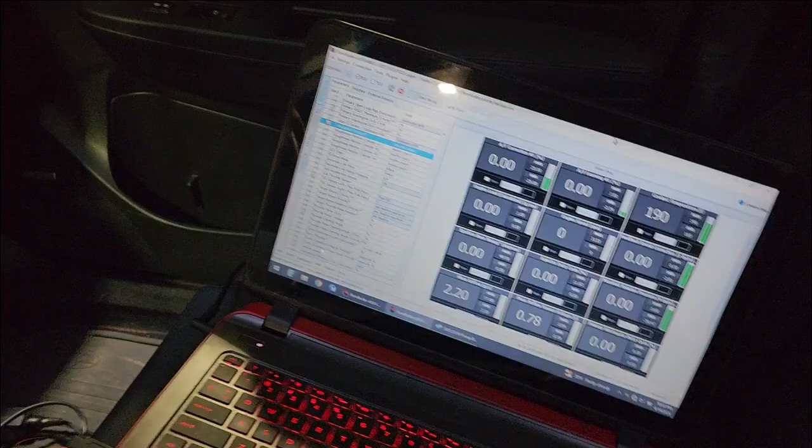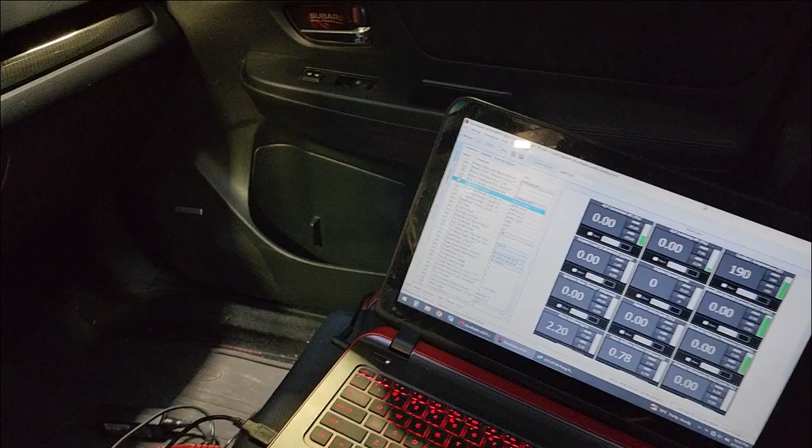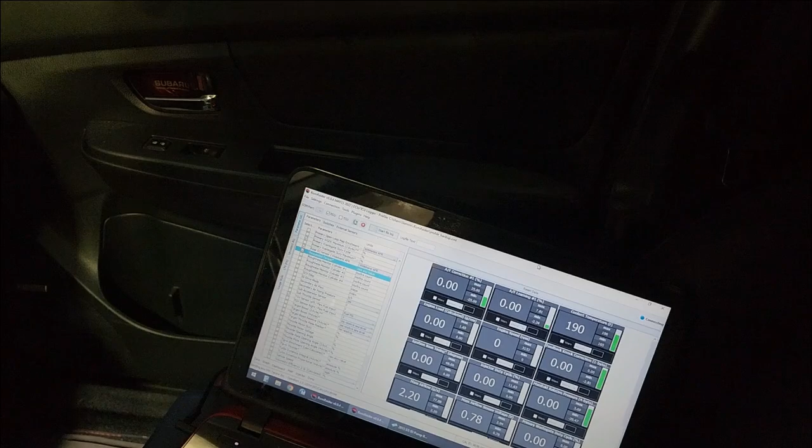All right, so normally with the deadhead system, I could start it up, the fuel trims would be perfectly fine. It would take a couple minutes for it to really blend the system together, all the fuel and everything, and then it would stabilize. But since I changed the setup, I'm pretty sure it's going to transition pretty fast, because as soon as I hit the key, it's going to feed whatever fuel was in the lines through and immediately start picking up the ethanol. So I topped off the gas tank completely. So let's see how fast it actually, there we go.

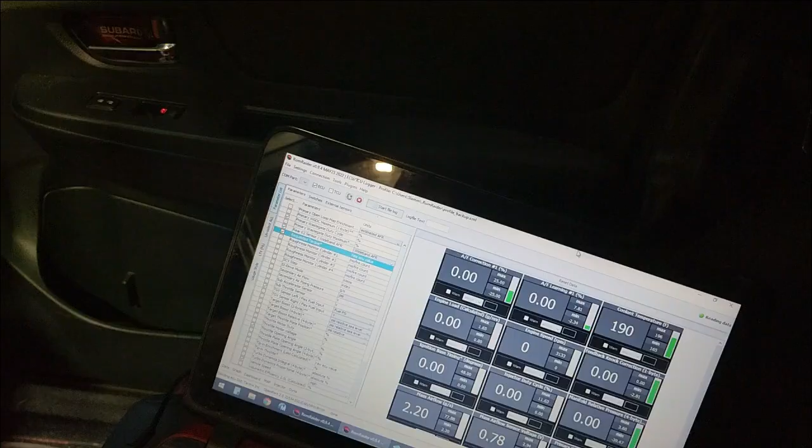So the car won't go into closed loop fueling for a few seconds, and it should immediately start adding fuel, sorry, not pulling fuel. So yeah, we're 21% so far, 23, 25. Let's see where it stabilizes. It looks like it might want to stay right around there.

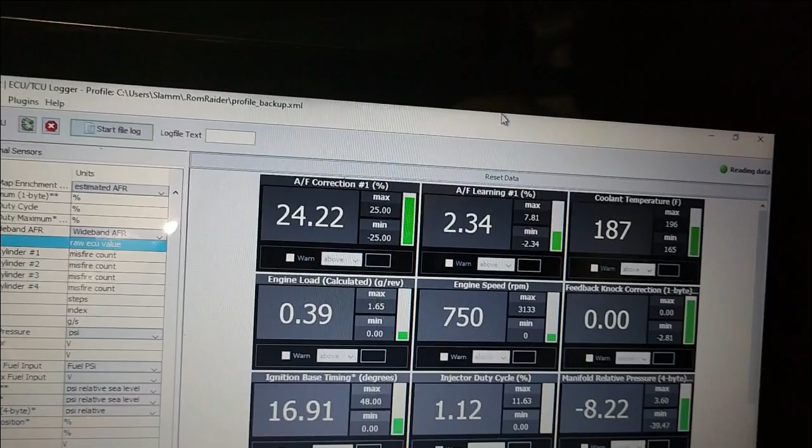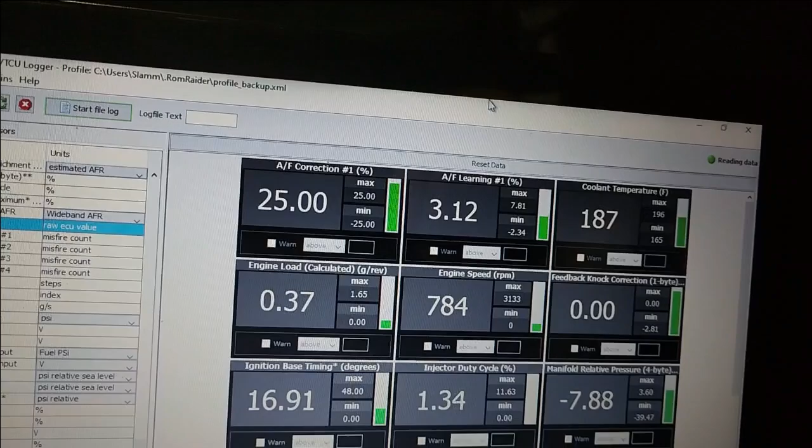So yeah, it looks like it's going to be somewhere around 25% combined. So 27 there, 28. Yeah, so it looks like we're good on the ethanol from what I normally am used to seeing, between 25 to 30%. So I'm going to go ahead and pull out of this pump right now and go park off to the side so I can flash the car over to my original map.

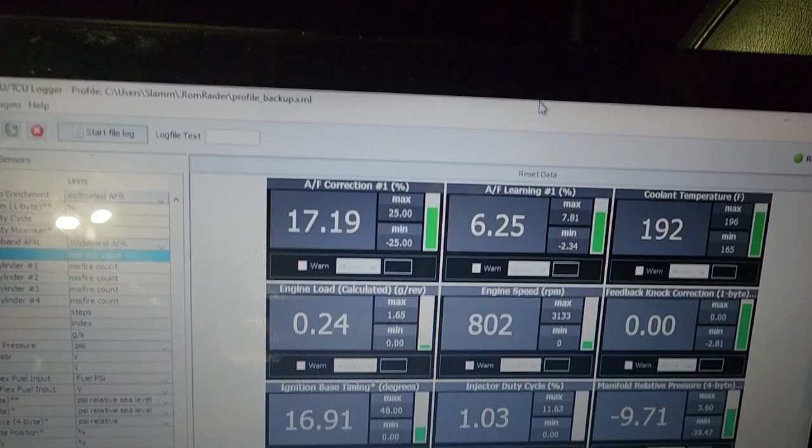Yeah, so look at 29, almost 30% so far. So yeah, everything's looking good. Let me flash it over and we'll check it out again. All right, so I'm parked over here off to the side. It's been running for like 30 seconds to a minute, but yep, targeting where it wants to target, and we are now, where are we at? Stabilize for a second. I have the AC on, so when the compressor kicks on and off, it kind of throws everything around, but 32%.

So yeah, I mean, that's everything where it should be. But this is a prime example of, just because you put E85 or pump in and it's not correct for the map, for the most part, the car will try to compensate. As you can see, it's targeting 14.7, which it's holding.

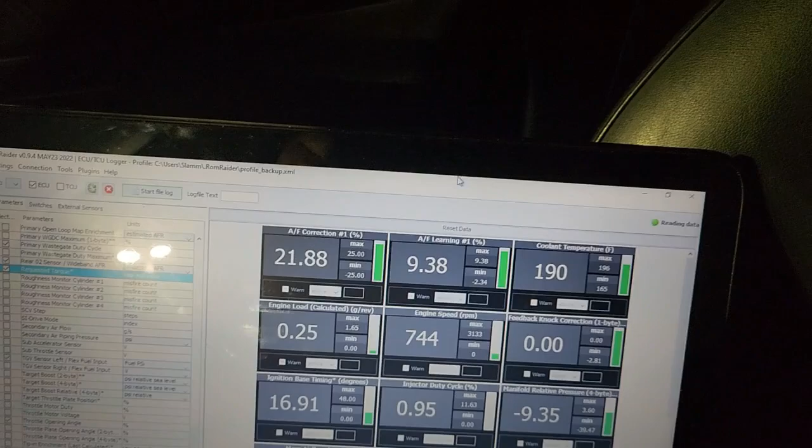But if you don't have an Accessport to look at your fuel trims, or you don't have a laptop to look at your fuel trims, it may be targeting and holding the AFR and drive okay. It might have some weird issues, but it's only because the computer's compensating so much. So now we're already up to 35% almost.

32, 33. So the car will compensate for the most part, and especially if you're driving on the highway without full load, the car will try to compensate as quick as it can and as much as it can. But the only true way to tell is obviously under wide open throttle. The car will not resort back to your fuel trims. It will just go to what was programmed in the car,

and that's when you will start to see the issue, especially on Subarus. I believe it switches from closed loop to open loop around, I think it's a very small amount, 3 to 5 psi is when it starts to transition. So you could be partial throttle. As soon as it gets to about that point, it'll transition over, and that's when it would start having the problems. Or just straight wide open throttle.

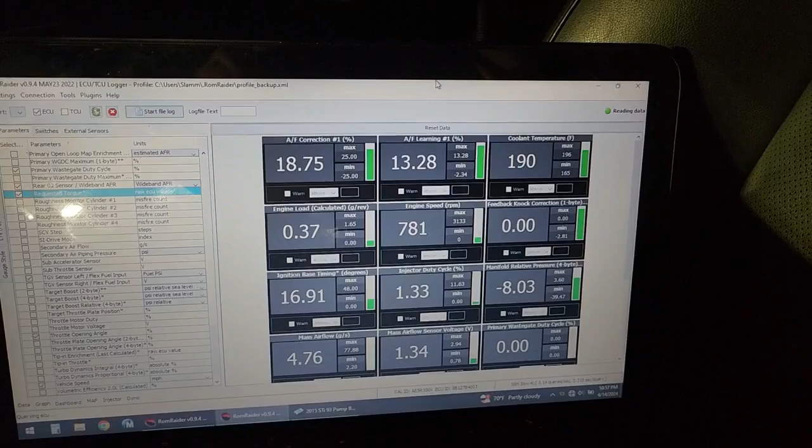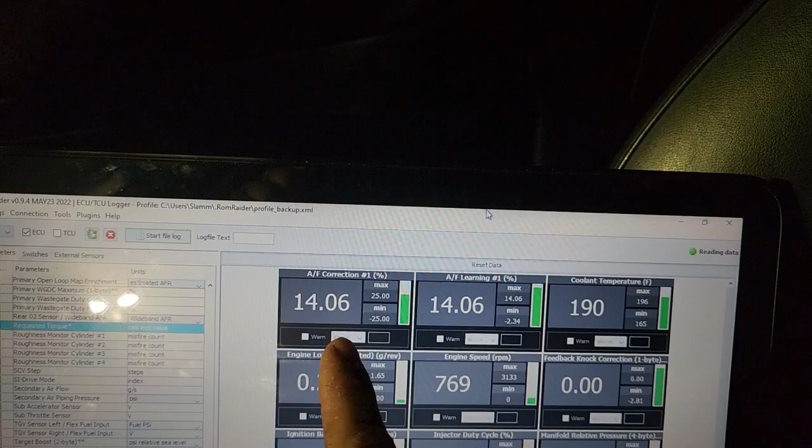But yeah, so we're down to, where are we at? 30, 31, 32, somewhere in there. And the reason why I'm saying 30-some is your fuel trim correction is what it's doing at the moment. That will always kind of bounce around here and there. But as it learns, it will transition that number back to here.

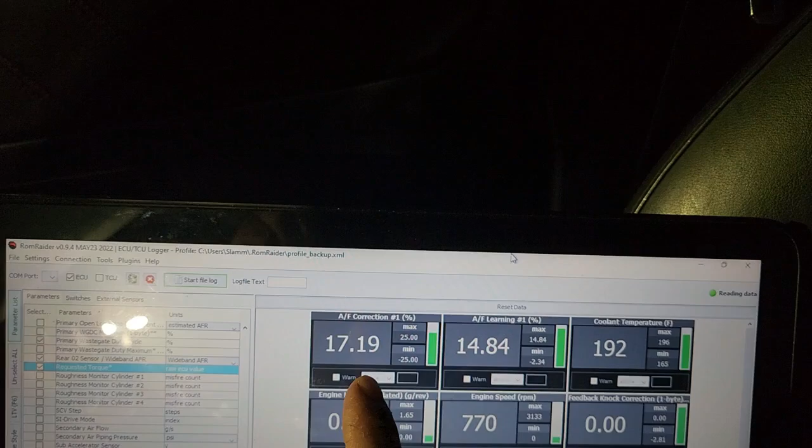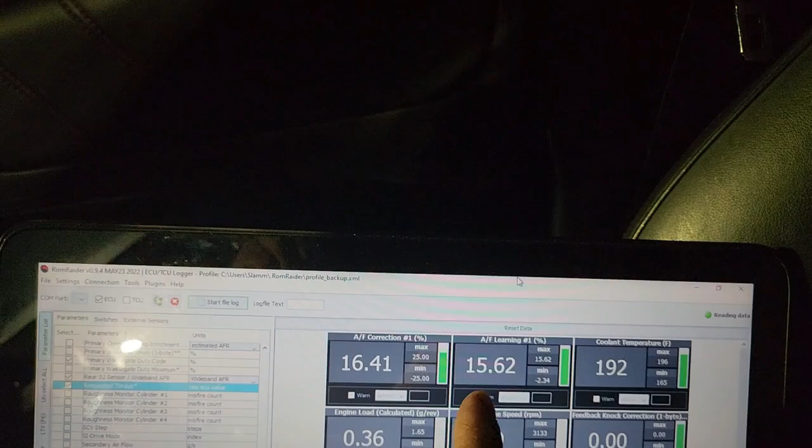So this is what it's already learned at idle to add 15%, and it's still adding 17% on top of that. But if I sit here and let it idle long enough, this will eventually go down to 0. And obviously, like I say, when the AC turns on and off, it does slight corrections, but it will get as close to 0 as possible. And then this number should transition all the way back over to 30%, 32%, or whatever these are adding together.

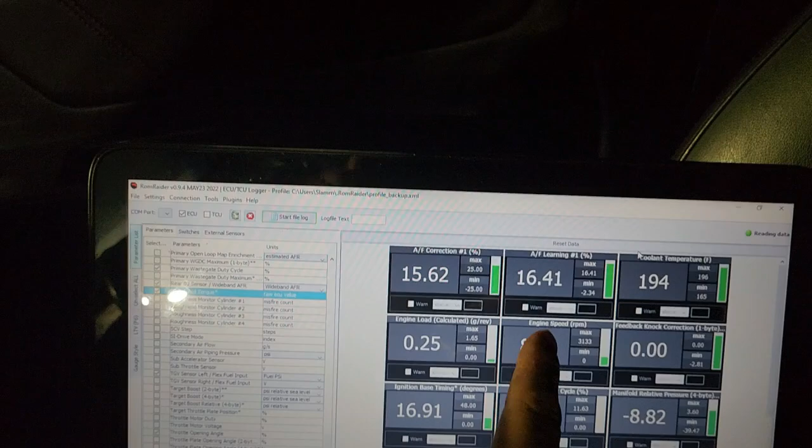The problem is, it depends on the car. Oops, that's what happens when you don't touch your laptop. Depending on the car, each one will max out at a certain amount. The immediate correction, I believe, maxes out at 25%. I don't remember if this is 25% as well, so you have a maximum of 50% compensation. But this one definitely is 25% where it maxes out.

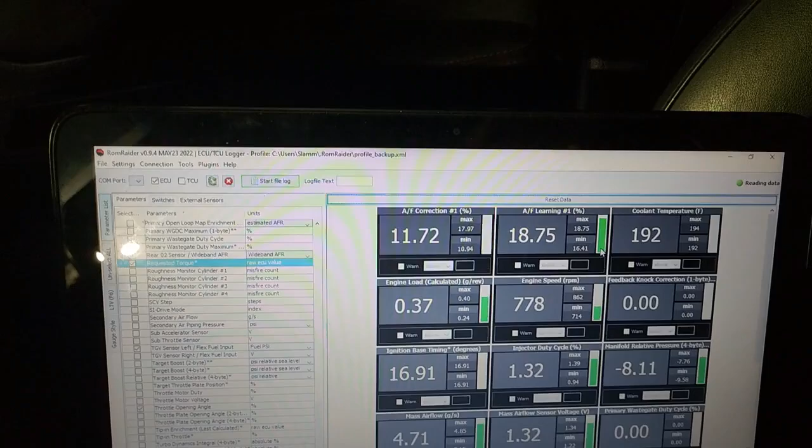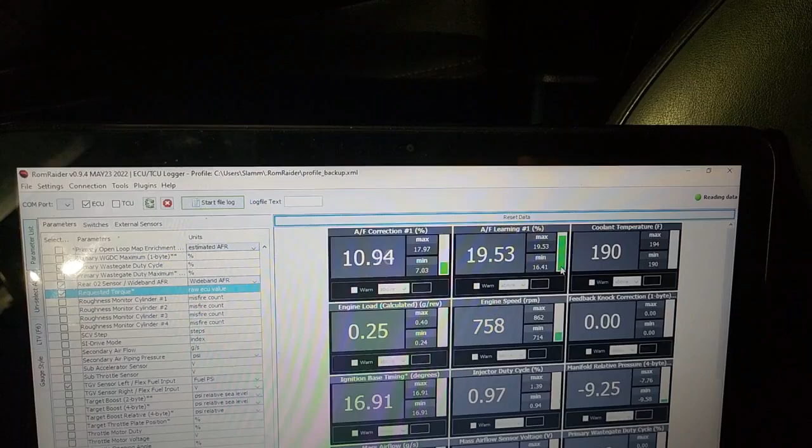I forgot where the learning is. I would have to mess with it to try to get it to completely start trying to correct long term. But I mean, I guess if I let it idle here long enough, we'll find out if it stops at 25% and then just leaves the remaining 7% over here on the short term. Since we're already up to 18.75, 19.53. You know what, I'm gonna go ahead and let it sit here right now, and we'll see where it maxes out, because I know the short term is 25%.

So, but yeah, I'm gonna let it run for a little bit and we'll jump back in, check it out. All right, we're back here. So the car's been running for a little bit more. I think this is where it's going to stabilize, but as I said, when I originally started the car, we were at about 32%. So we're at 32.

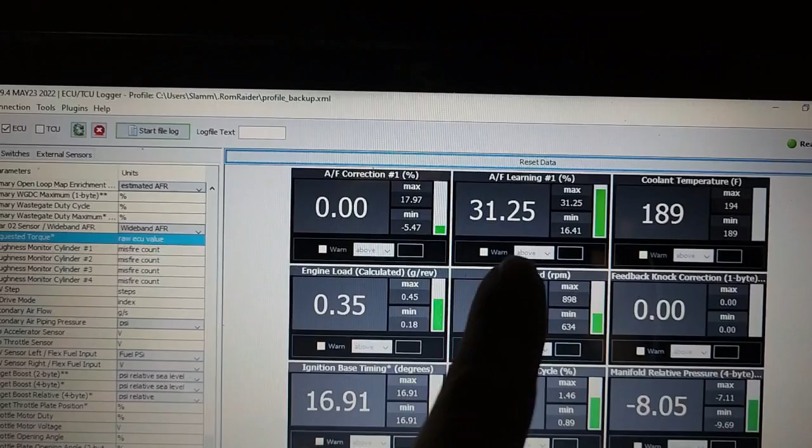Bam, just changed right on the dot. And now your short term is sitting as close to 0 as possible. Like I said, with the AC turning on and off, it does jump back and forth, but this is probably where it's going to stay. For the most part, it sits at close to 0.

When the clutch engages, it'll get rich or lean, and it adjusts immediately. But yeah, the car's finalizing its fuel trim, so we're at 31% right now.

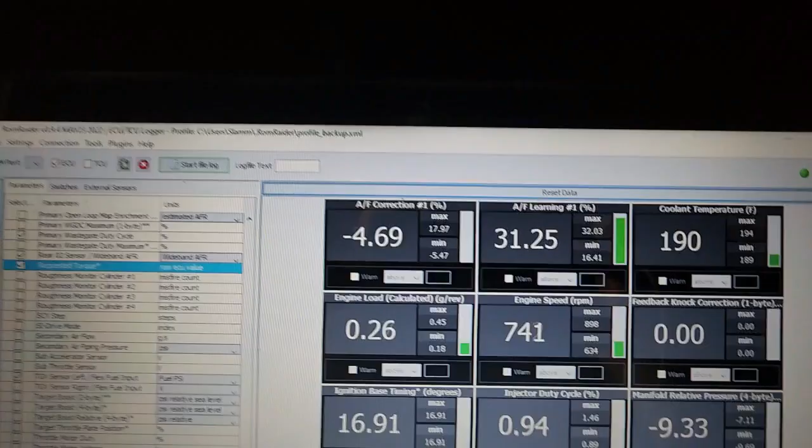But I wanted to show you this table that I have from Carberry, which is for the 02 to 05 WRXs, just so you can, let's see where we're at. So, of how you can use the fuel trims to find your ethanol content. But this is off of another tune.

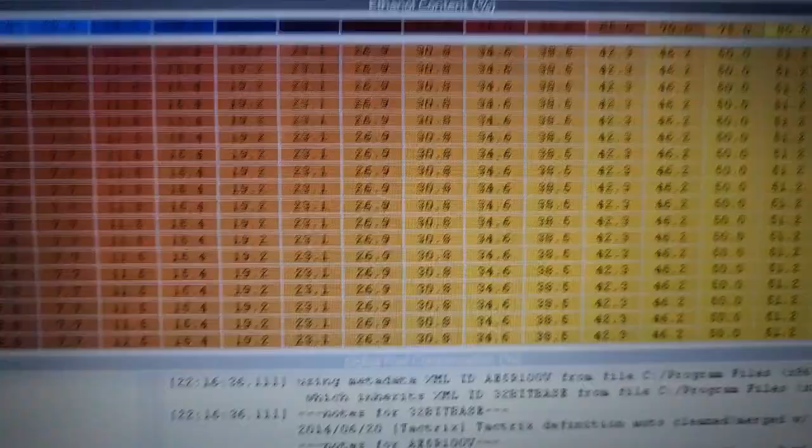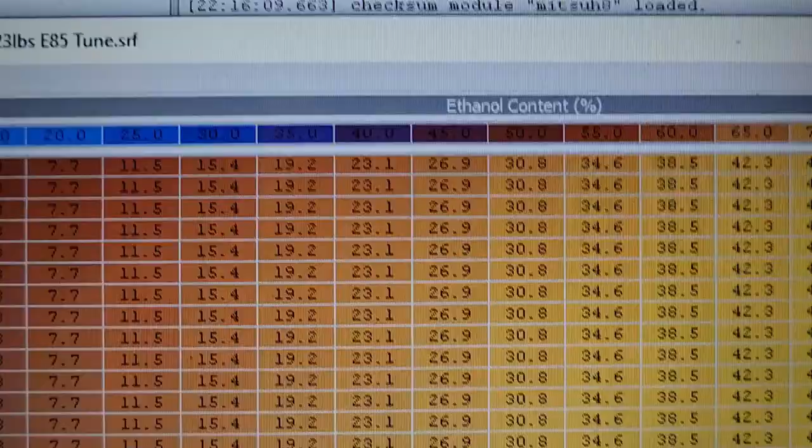But if you look right here, if we're at 30%, adding fuel about 30%, if you go up here, I don't know if you can see that, but that says 30%, 50% ethanol content. So this is a table that, as it reads more ethanol, it'll start adding more fueling, all the way up to an E100, which is about 56%. So obviously this is not exact, but this is a pretty good trim.

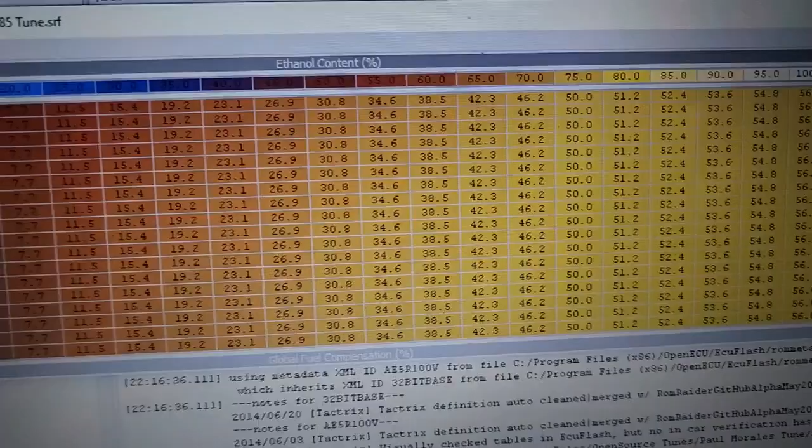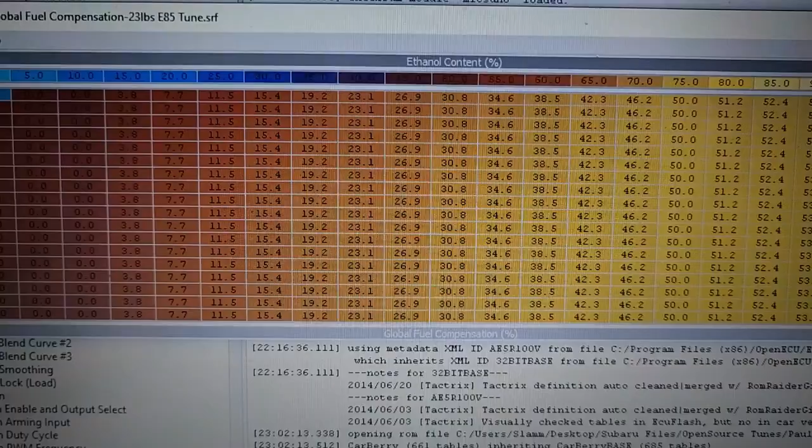This is from my buddy's car, and he's had that car for 3-4 years, something like that, on E85, and it's on a flex fuel setup through Carberry, and he's always ran it out there in Cali, and just fills up pump E85 all the time, no problem starting, no nothing.

But just so people can understand, there is a linear calculation that the fuel will transition as the ethanol content goes up. So like I said, with me being right now at 32%, that falls right in line with what I was thinking, somewhere around 50% ethanol. So I'm tuning everything timing-wise and whatnot based on an E50 mix.

So I'm pretty sure I've never even had a full E85 tank in here, but I just fill up through the pump, and like I said, I just showed the clip. The pump states anywhere between 51 to 83% ethanol. So yeah, it is what it is.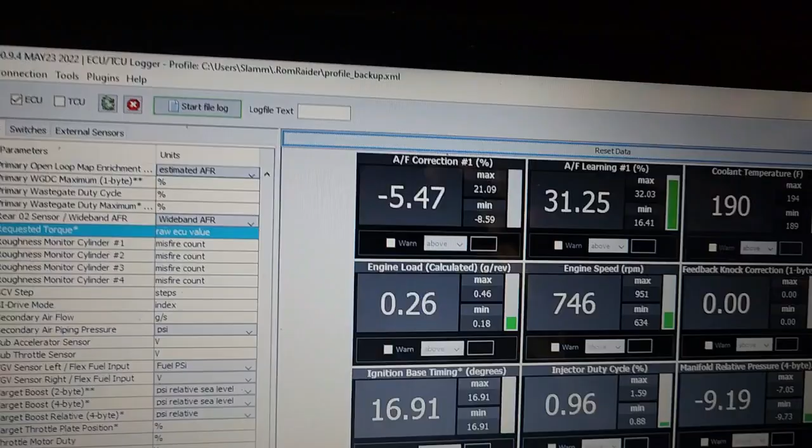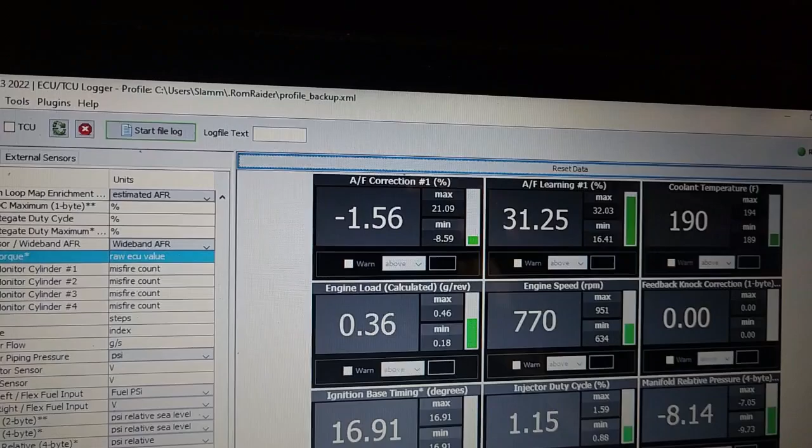But I'm going to go ahead and flash my map back over. But we got up to 32%. So I guess the learning can go up pretty high. So I'm not sure exactly where it's at. Maybe one day I can change the injector scaling just to see where it maxes out. If anyone wants to know, this is the information that I like to know, just because it's good information.

A lot of people don't really talk about it, but I have filled up on my E85 map with pump gas, and vice versa on pump gas with E85 map. You can drive, the car will compensate. The big thing that you do not want to do is do not go into boost. So if you're just trying to get yourself back home or whatnot, stay in vacuum as much as possible, because the car will compensate for the fueling side of it.

It might have some weird judders on like the tip-ins and whatnot, but for the most part, the car will compensate fueling-wise. And in all reality, if you're in vacuum, your timing shouldn't be that drastic a difference from E85 to pump, or vice versa. The main difference comes when you start going into boost, when you can really start advancing the timing. So if you're in this situation like I was, you can drive the car around and it's not going to hurt it as long as you stay out of boost.

If you go into boost, you can definitely do some damage, more so if you're on your pump gas map and you put E85 in the car, because the car will be extremely lean. You won't hurt the car from detonation necessarily, because the timing is a lot safer on pump gas, but it will lean out the car very much and you can crack a piston. So do not do that.

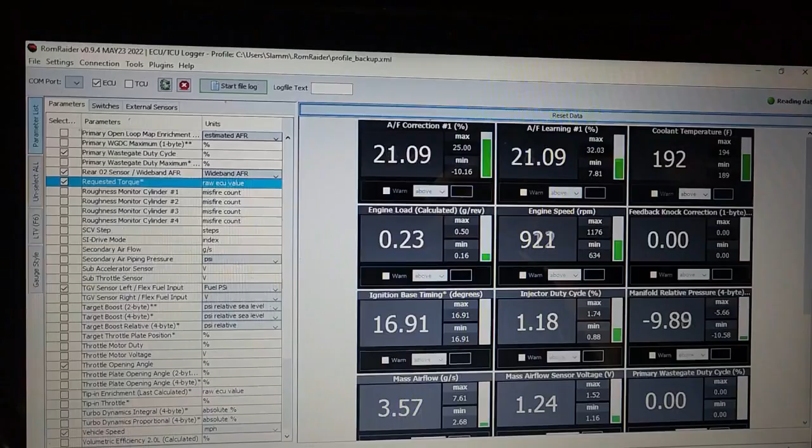So that's right there. So the cars do pretty amazing on adjusting fuel while it's running, and most people never even notice that it does it. So all right, let me go ahead and flash this map over, and we're going to see what's going on here.

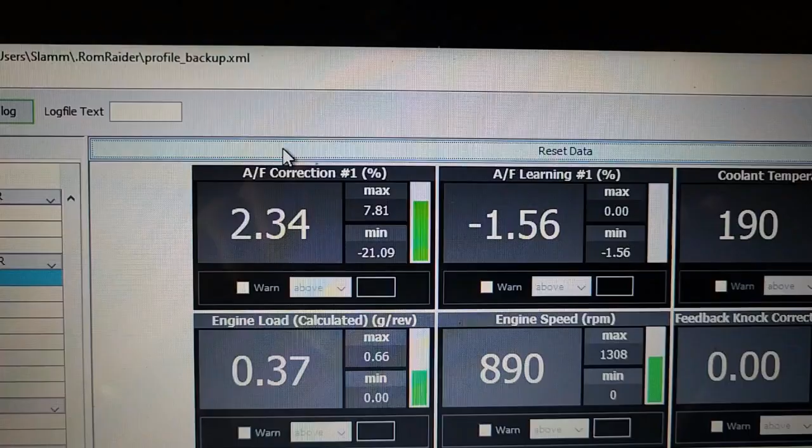All right, so we went ahead and just flashed the E85 map back. Car's kind of stabilizing, so it's learning a little. But right now, as you can see, fuel trim's a lot better. So since we got a negative 1.5 and 2.3, we're at 0.7 or so. Yeah, so we got pretty tight tolerance there at idle, so it's not bad. If I turn the AC off, it definitely is better, but I can live with that.

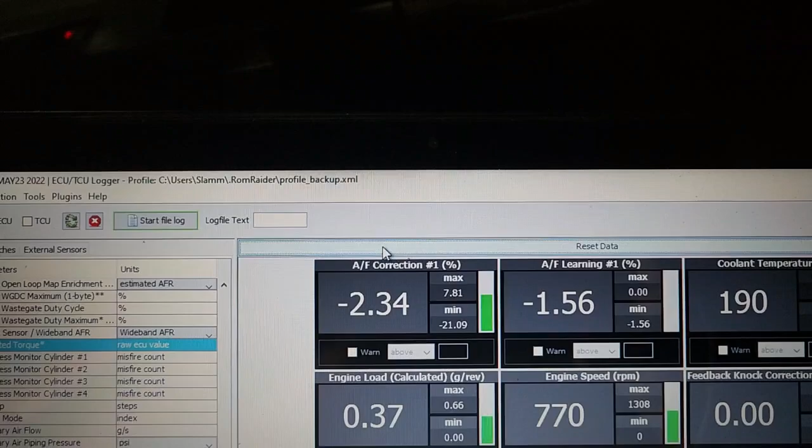4%, a little on the rich side as opposed to the lean side, which I always prefer. For some weird reason, which is kind of funny, if you're ever a little lean and the car has to compensate, you can feel that when you're driving around. What I notice is if you're a little rich, like that, a couple percent, and the car needs to pull fuel, when you tip in or get on it, you never feel it at all. The car is a lot better.

So if you're dialing in your fueling, obviously the goal is 0, but a little on the rich side, like a couple percent, is really not that big a deal. So you'd much rather be on the rich side as opposed to the lean side when you're driving around. So just keep that in mind. I know everyone wants to try to target 0, but in all reality, you're never going to get a straight up 0, because it's going to depend on if your AC's on, if you move your steering wheel. There's so many factors, and every car in stock form does the same thing as well.

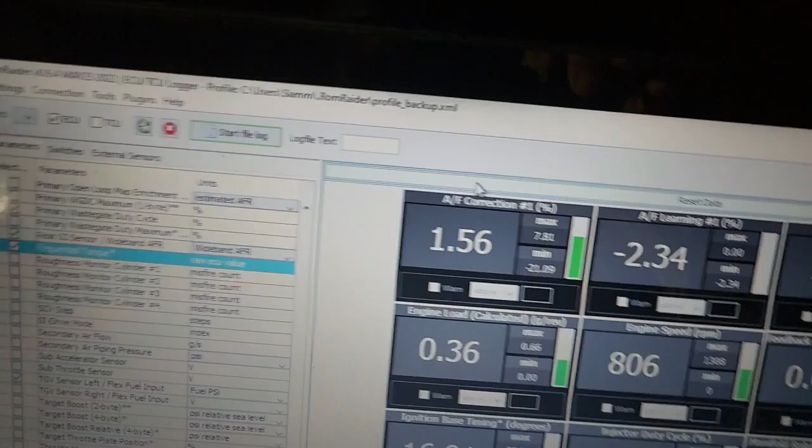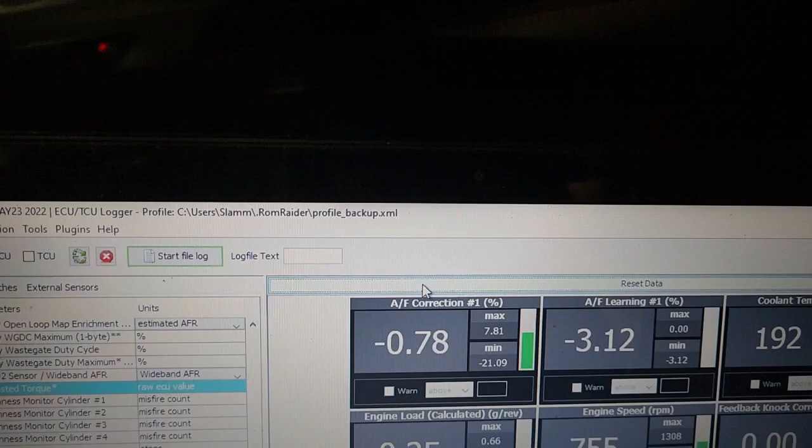So from my job, I diag cars, so I look at scan tool data all the time. So I've learned fuel trims in and out, what they're telling you, what it can do, and no car's ever 0. They try to target 0, but there's so many factors on a car, especially a mass airflow car, that can change your fuel trims. Obviously every car, even speed density, will change the fuel trims with any load compensation, temperature shifts, whatnot. So just get it as close as possible. Nothing's ever going to be 0 at all times, so don't freak out about your fuel trims if they're bouncing around.

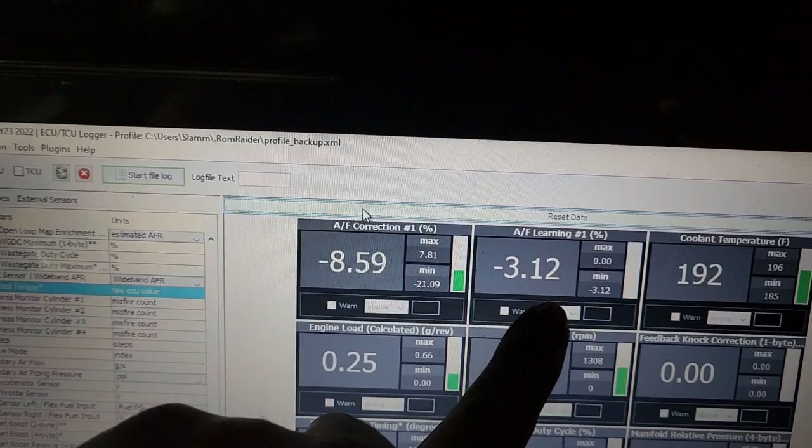Your biggest concern would be your learning. Your learning is going to be something that it learns over time, but this is part of the reason why you don't want to be flashing maps back to back to back. Granted, they should be tuned pretty legit and not have to compensate very much, but the more you drive on a map, the more fine-tuned the car will get it in vacuum. So your drivability will clean up a fair amount just driving around normal over time.

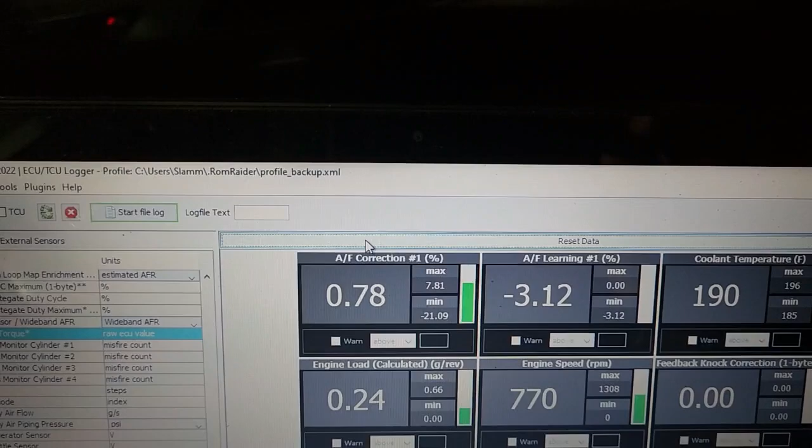So I've noticed that my car does do better and better when it can clean up the small inconsistencies like this right here. See, 3%. So I'm a little 3% rich, but it's learned that, and just let the car do its thing. It'll learn over time. The longer you drive on that map, the better it'll drive. At least from the aspect of closed loop fueling, where the car can compensate. But under wide open throttle, your map is what your map is. So keep that in mind.

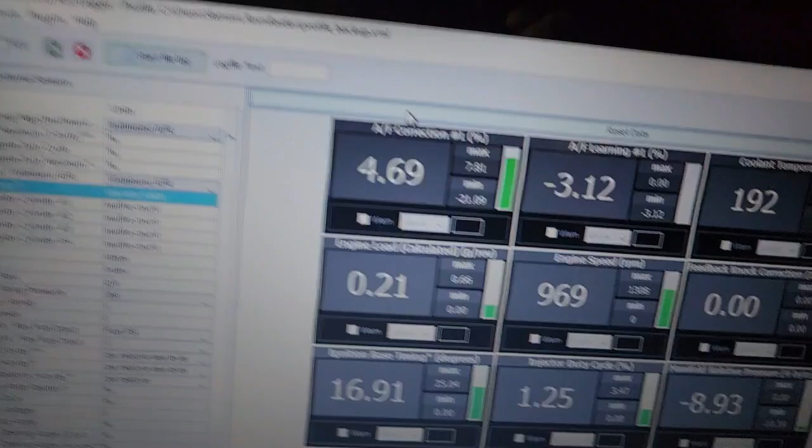Drivability is obviously a big concern for me as well, but your car will clean up some small stuff here and there the longer you drive on that map. So don't spend too much time trying to get everything dialed in on your closed loop map, because any little thing will throw off your values from one day to the next, and you can just be fighting yourself and going in circles. So obviously I like to at least try to keep it single digits, and like I said, where it's at right now, right there we're at -3, -4, now we're at 1.5.

So I mean, it's pretty close to as zero as you can get. And like I said, with the AC on, that definitely is the reason why it bounces around every once in a while when the clutch engages and stuff. So all right, well, I'm gonna go do some driving, and we're gonna see how she feels.

I haven't been on E85 for this whole week, man, and it's not good. E85 is amazing, and it runs so much better. It smells awesome, which is probably one of the bigger things. Probably not the greatest thing to be sniffing fuel, but hey, you know, I get some extra money out of that, so some enjoyment for myself. But yeah, we're gonna go take it for a spin and let's get some E85 back through this motor.

All right, so we're driving. Feels good. I did a couple little pulls in third. It's a little hard to do it with holding my phone in my hand, but let's do a little third right here. She sounds good, man. Oh yeah. Yeah, she's alive. It's got that E85. The car feels so much better on E85. I can't even drive this thing on pump gas, man. It's so depressing. But she feels good. We're back in action.

So yeah, get a flex fuel sensor and don't have a bad week like me. You know how hard it is to have people come up and want to run and know you're not going to give it your all because you don't have all the fuel that you need. But yeah, so we're cruising down the freeway and you can see the fuel trim still pretty close, dialed in pretty good. So like I said, I drove all the way to Dallas for Texas 2K, and I got about 280, almost 300 miles to a full tank. It did extremely well on the freeway on E85, so it's not too shabby.

So one thing I do want to ask, if anyone knows, I saw the setting, and I guess I could just play with the numbers, but there is a setting in there for your gauge for the range of how many miles you have left and whatnot. The fuel compensation or fuel, I forgot what it was called, but there's a table that I saw on RomRaider that has a value. If anyone knows what the value is for E85, I don't know if I should just do like 30% of whatever's in there and see how close it comes.

I might just do that and flash that back on the car. But if you have an actual value of what it should be, reach out, let me know. Saving the trouble of flashing back and forth trying to get it as close as possible. But yeah, so it thinks it has gasoline in it, so obviously the miles per gallon and the range is going to be off. But yeah, so we're back in action, man.

I can finally start driving around on full boost if I want to. Like I said, I normally just stay in sport. It's around 23 and a half pounds. That's definitely plenty. But now I can try to go to the dyno, because that whole tank of regular fuel kind of ruined my whole chances of taking the car to the dyno. So yeah, everything's good, man. We're good. I'm gonna go back into work week, but I want to try to schedule that dyno and get out there and let's see what this car does actually make.